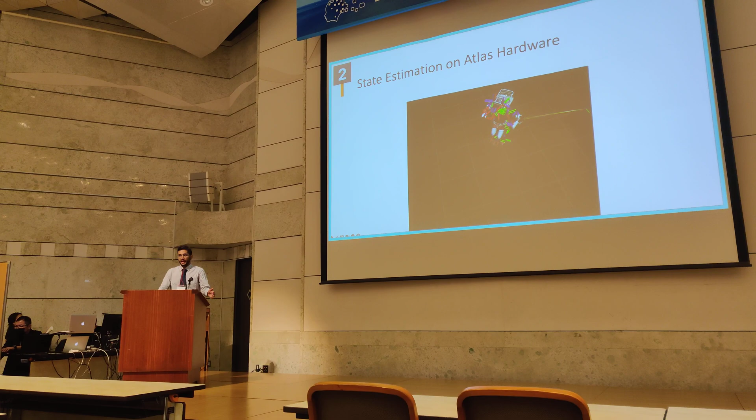Frameworks to perform proprioceptive state estimation on a legged robot. Here you can see an example of an Atlas robot with proprioceptive state estimation overlapped with the ground truth. You can see it's actually doing a pretty good job of the state estimation.

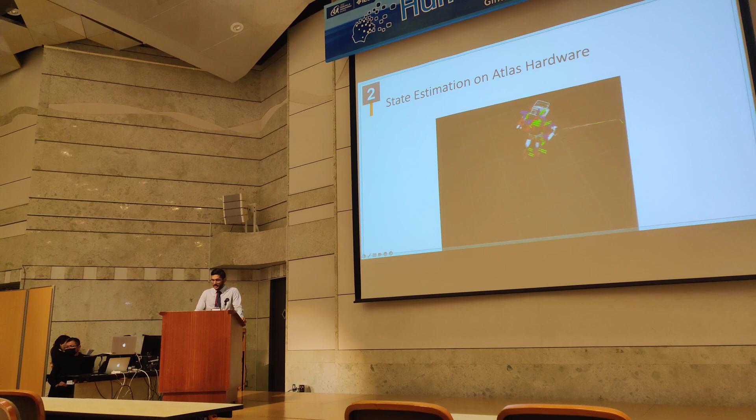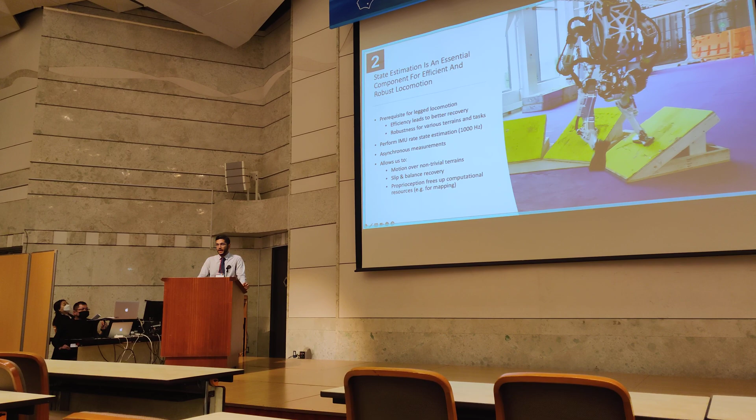State estimation is actually a very important problem because, as you've all seen, there's lots of cool work happening in locomotion. But in order to account for slip, various terrain mappings, and different unknown problems you might have with locomotion, having robust, accurate, and efficient state estimates is a very important prerequisite. The main reason we choose to do proprioceptive state estimation is because it also helps free up computational resources for other things such as planning or mapping. We saw this amazing talk right before about using an offline planner, and because the offline planner can now be online, you now have more compute.

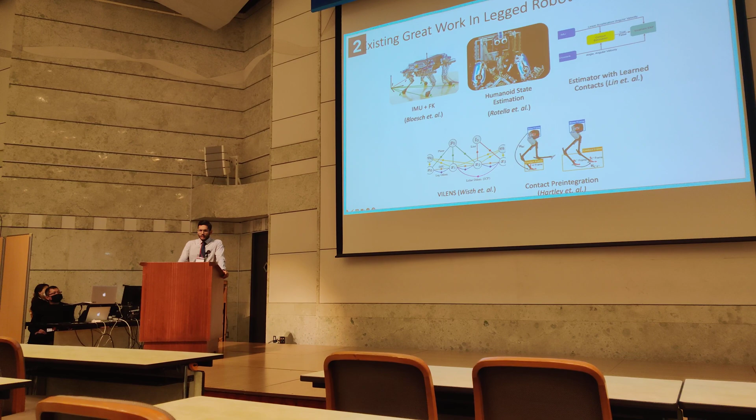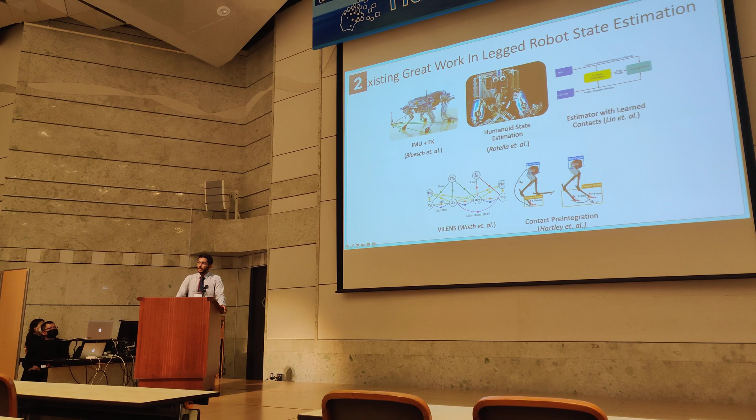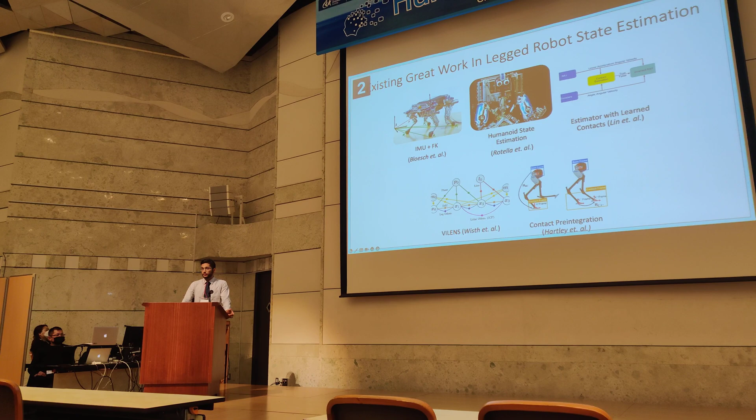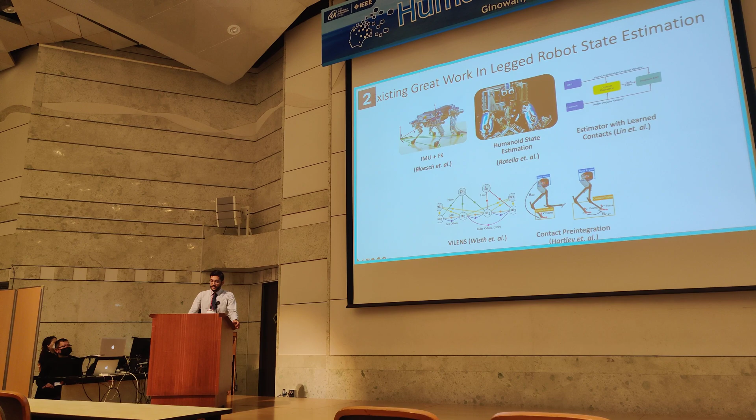There already exists a lot of great work in legged robot state estimation, and I want to position where our work stands with respect to this. The top row represents all filtering-based approaches, whereas the bottom row represents factor smoothing-based approaches. The original work that used proprioceptive state estimation was by Michael Bloesch in 2013, which used the IMU as well as kinematic legs. That was followed up by work by Nicholas Rotella, applied to a humanoid with a flat foot constraint, or point foot constraint. More recently, Tzu-Yuan Lin at the University of Michigan has done state estimation using learned contacts, via a neural network contact estimator.

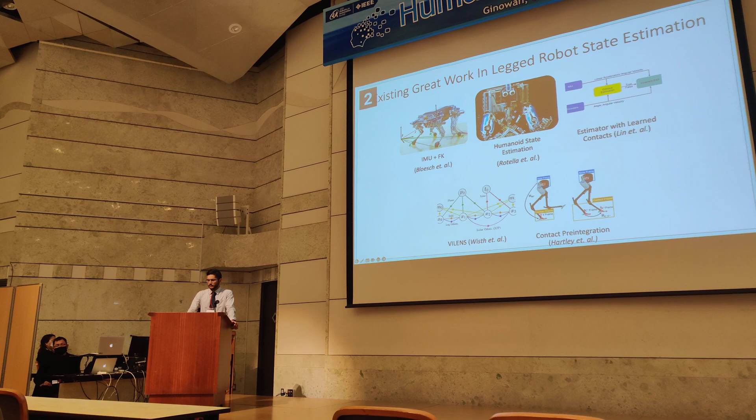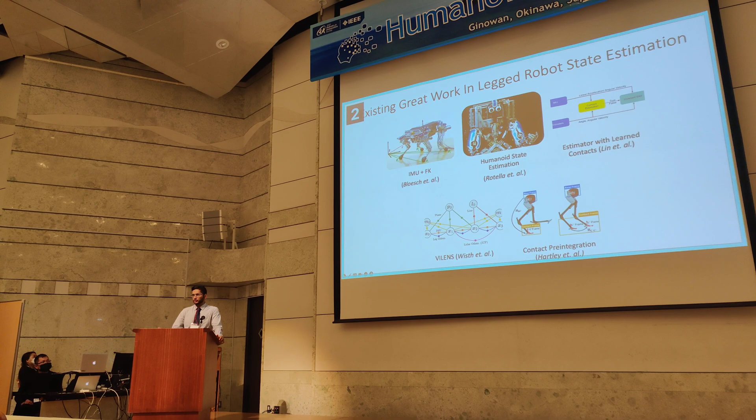On the bottom row, we have VILENS as well as contact preintegration. Both of these are actually hybrid approaches—they also use exteroceptive measurements. VILENS, the V and the L stand for visual and LiDAR. And contact preintegration also uses camera information to do state estimation. But the important insight we have from all this work is that all of these state estimators basically follow one particular factor graph formulation.

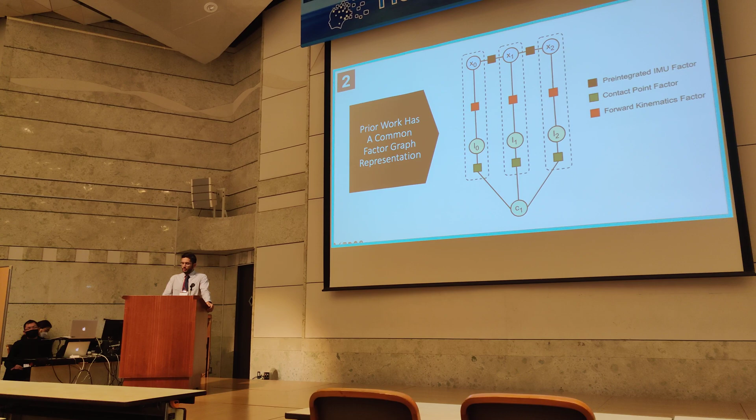All the x's represent the base states, and then you have the legs, with subscripts as the time indices. I'm using plate notation to represent multiple legs—not just two, but also four, six, eight, you name it. At each plate, the C1 represents the contact point, basically saying L0, L1, L2 are all connected to the same contact point—that's basically stance states. That insight is what we leverage in developing our proprioceptive state estimator, because now we can use the factor graph and its very useful properties in developing our framework.

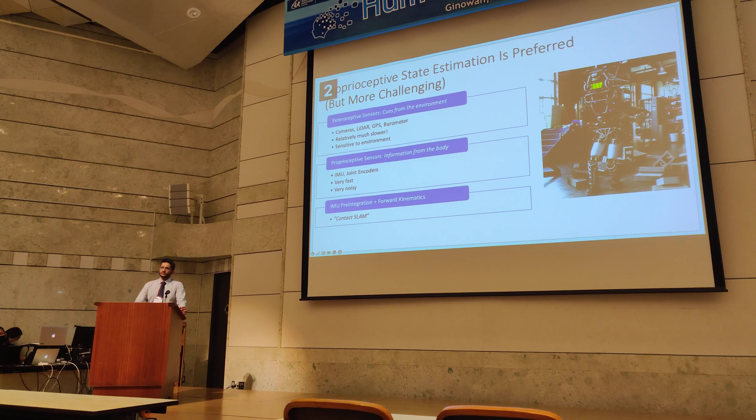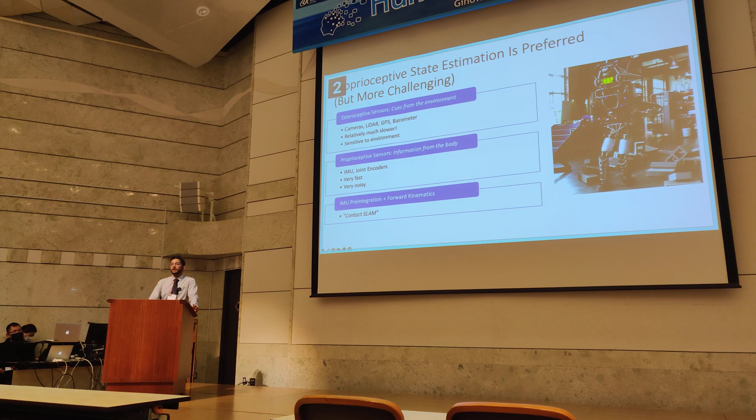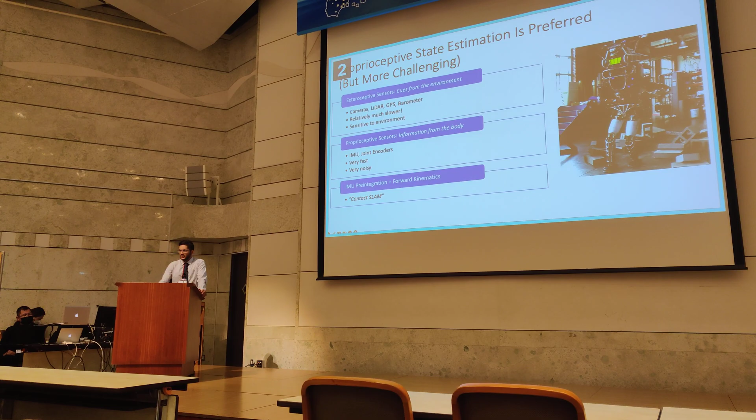Proprioceptive state estimation is preferred, but of course it is more challenging, because normally you get cues from the environment using camera, LiDAR, GPS, and a barometer. You get all this very useful information, but it's very slow and computationally expensive, especially cameras these days. And these sensors are sensitive to the environment—differences in lighting, differences in pressure, minor things. However, proprioceptive state estimation doesn't suffer from those problems.

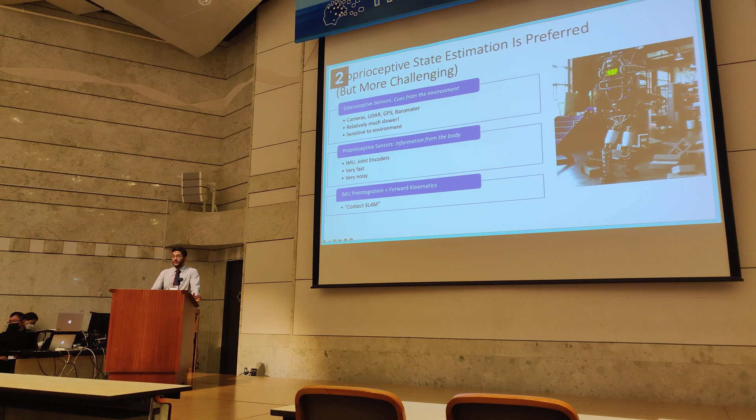Unfortunately, it is very noisy. IMUs, especially the ones on cheaper quadrupeds and cheaper humanoids, can be terribly noisy. They have very strong biases that need to be accounted for. But the good news is they're insanely fast—they can go up to 400 hertz, and the Atlas robot, for example, has an IMU that runs at 1,000 hertz. So if you get 1,000 hertz state estimation, that's pretty awesome.

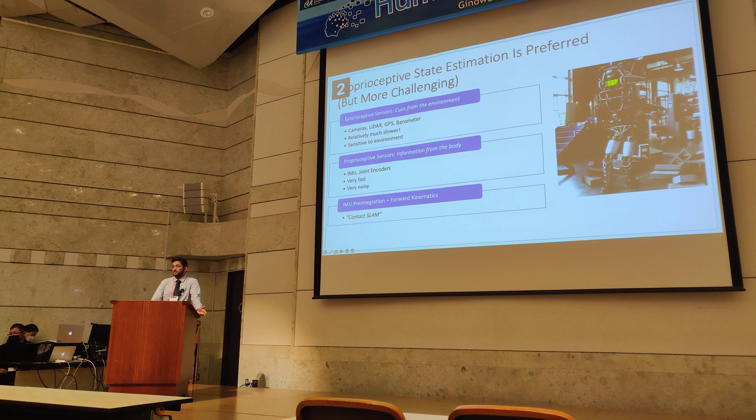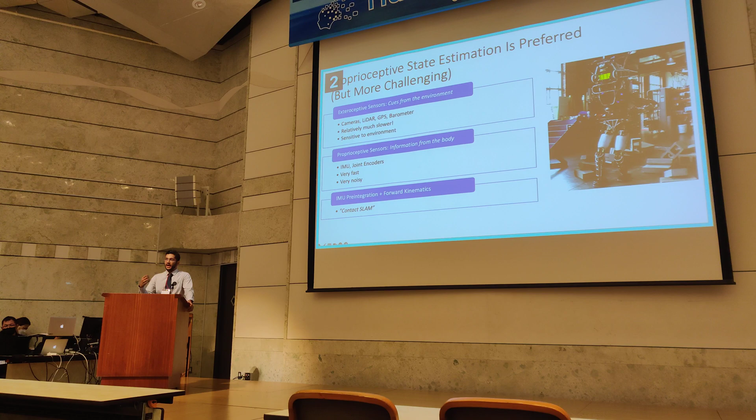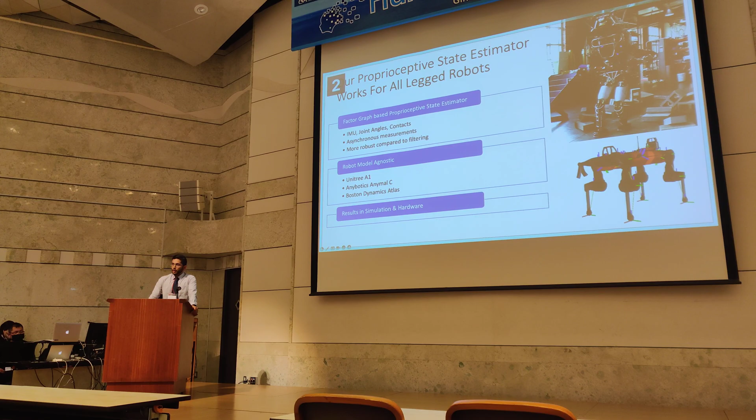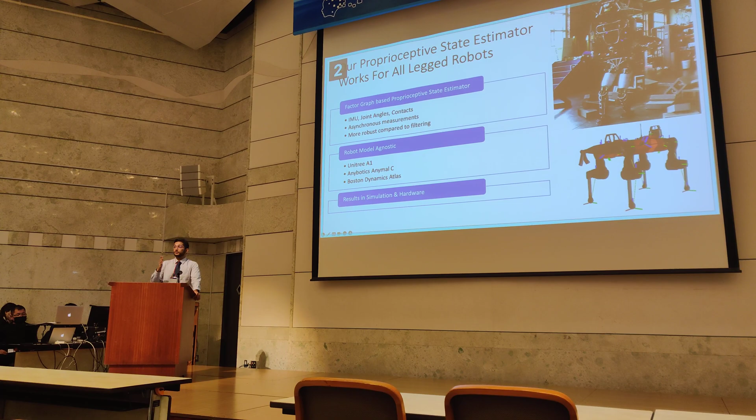So we want to take that approach and basically model this entire problem as a contact SLAM problem—your contacts are your landmarks, and your camera is the base of the robot. Basically, we're putting a blindfold on Atlas, as you can see. The cool thing about our framework is that it works on all legged robots. We only use the IMU measurements, the joint angles, and contact measurements. Our framework allows for asynchronous measurements, so all the measurements do not have to come at time-synchronized steps—they can come asynchronously, and we can still perform estimation accordingly.

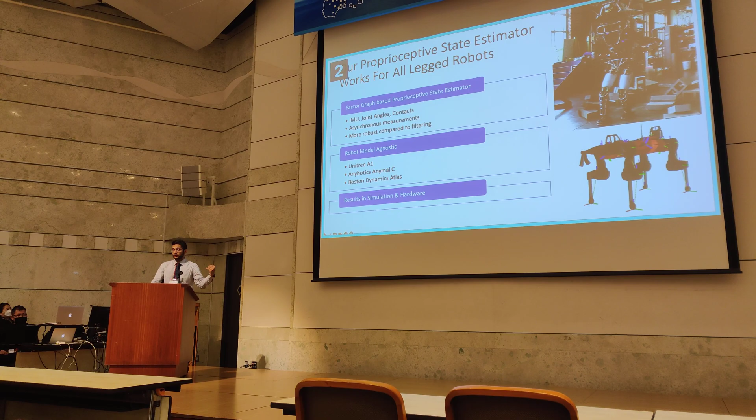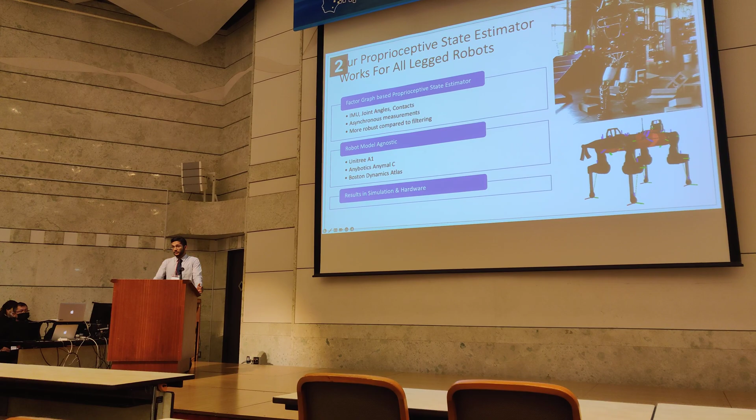It's much more robust compared to filtering because it uses the entire history of the trajectory rather than just the last step. As I mentioned, we are robot model agnostic, and I will show results on the Unitree A1, Anybotics Anymal C, and the Boston Dynamics Atlas. We show results both in simulation and on hardware. The key difference for our work is that we model each link in the kinematic chain—from the hip going down to the foot, with multiple links accordingly.

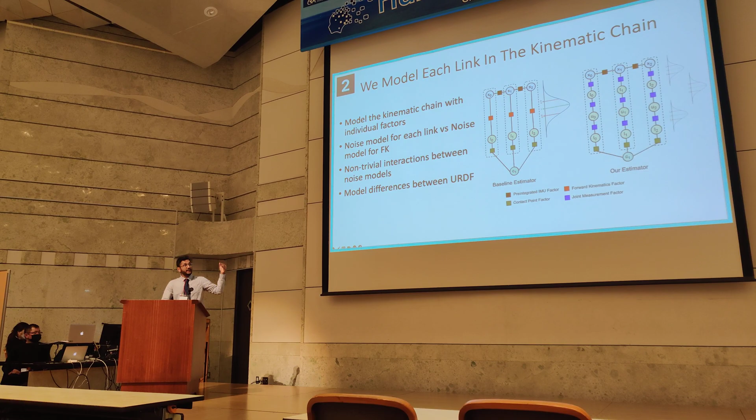So instead of having one forward kinematics constraint or one forward kinematics factor, we instead add this joint measurement factor for each particular joint. As you can see on the right-hand side, we have the upper leg link and the lower leg link, and each of them has a factor that constrains between the two individual links.

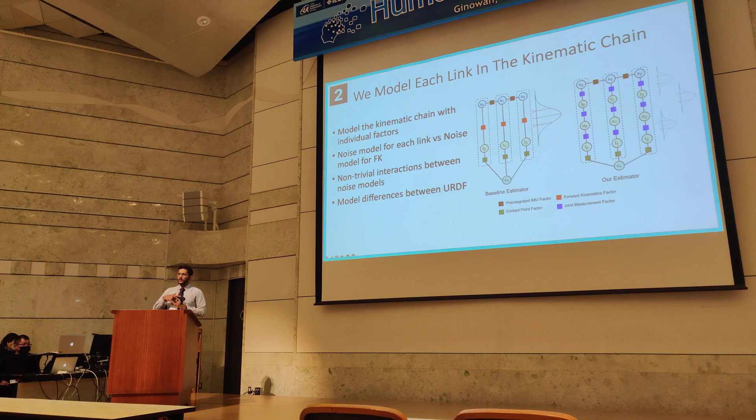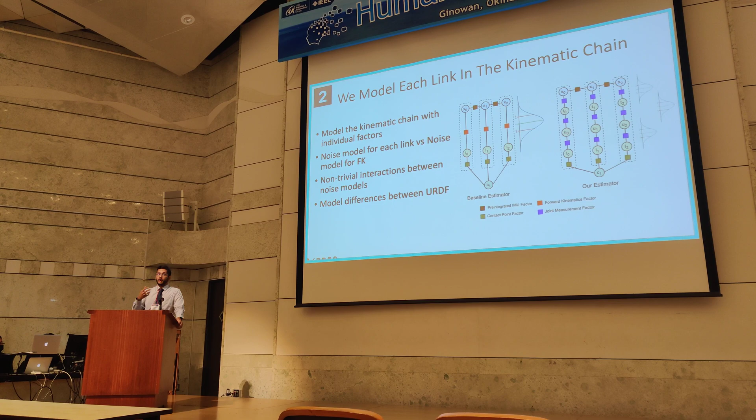The nice thing about this approach is that each noise model between the links allows for non-trivial interactions, and also can model deflections based on the URDF. For example, if the weight of the robot is very heavy and there are deflections based on the difference in the URDF from the manufacturer, our system can account for that deflection error.

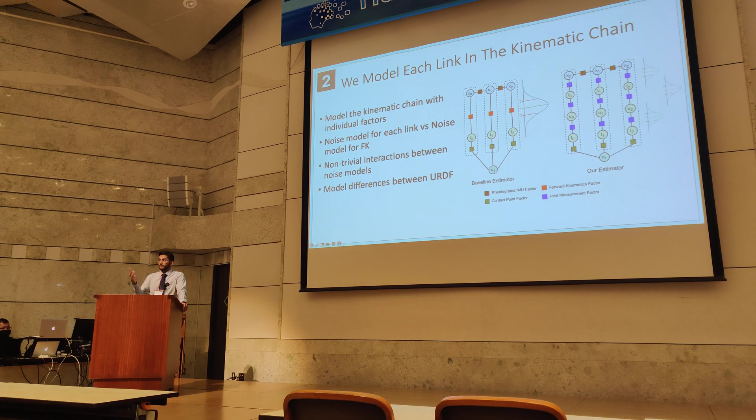And yeah, that's basically it. And to get this to work on different robots, all you have to do is give us a URDF and it just works. We construct a factor graph for you and we optimize.

Enough of the math, let's talk about some results.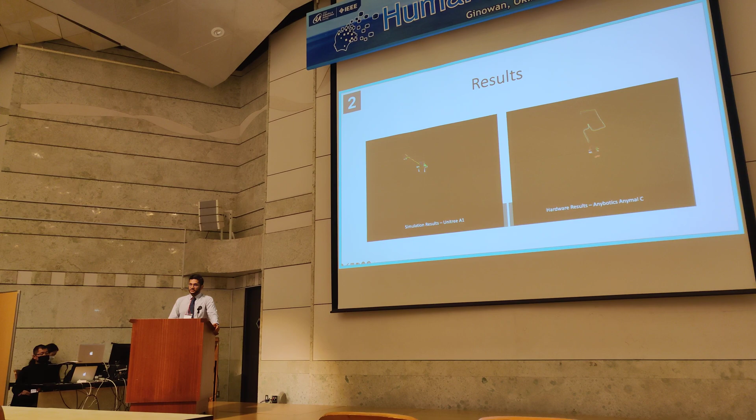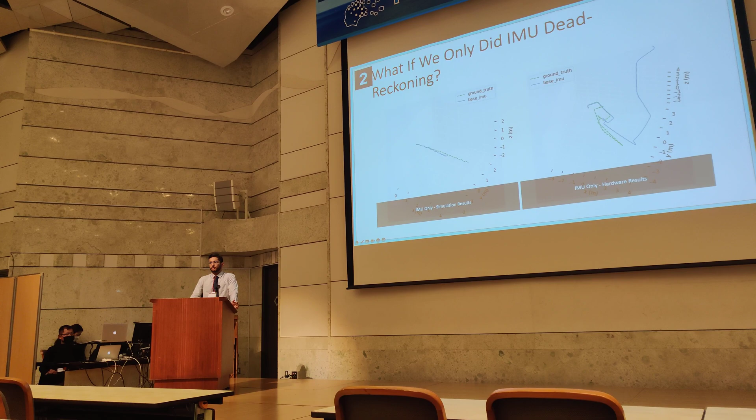Just to position ourselves, if you only use the IMU and didn't have anything else, just to give you an idea of how noisy IMUs can be, you can perform dead reckoning and try to get results. As you can see, the IMU decides to fly up on the Anymal robot, and it doesn't even reach the end in simulation, and that simulation was relatively noiseless.

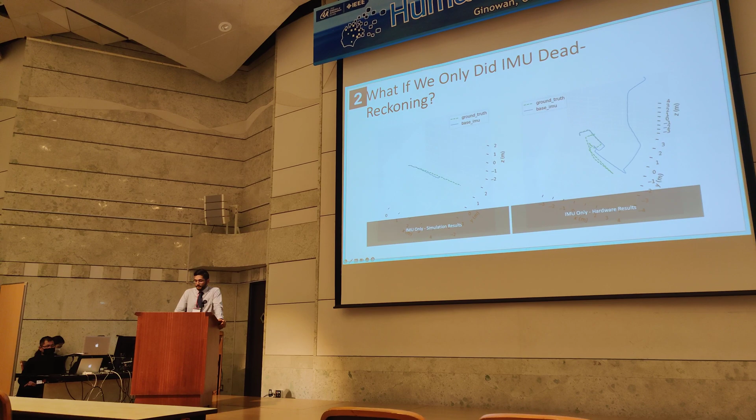So first, let me run through some results in simulation.

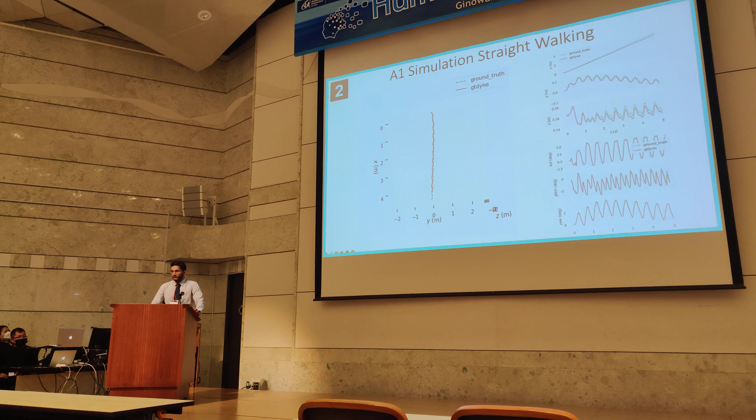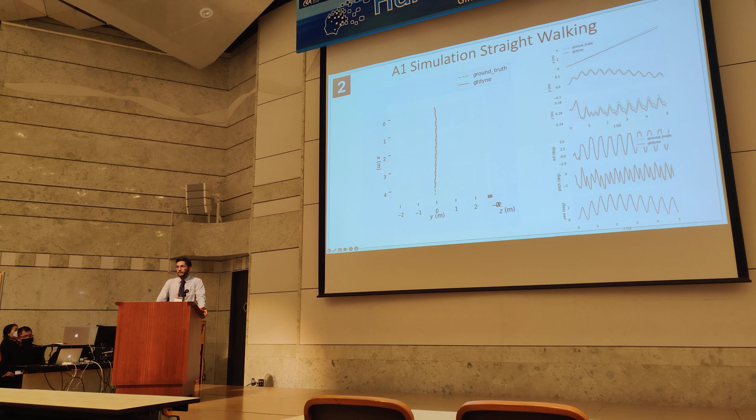It's very important to run in simulation because if it doesn't work in simulation, it's not going to work on hardware. So this is sort of like a litmus test - if it works well, then you can maybe deploy it on a robot and actually spend the hour, time and money potentially dealing with all the inconsistencies that come with working on hardware.

The cool thing is, our estimator just works on hardware. With minimal change - all you have to do is change some noise models, some parameter tuning, and just change the URDF. It's not a big difference, and as you can see, I'm showing results where we have three trajectories.

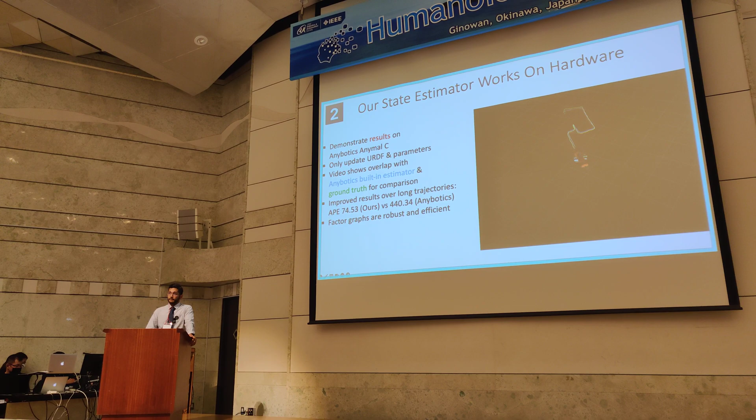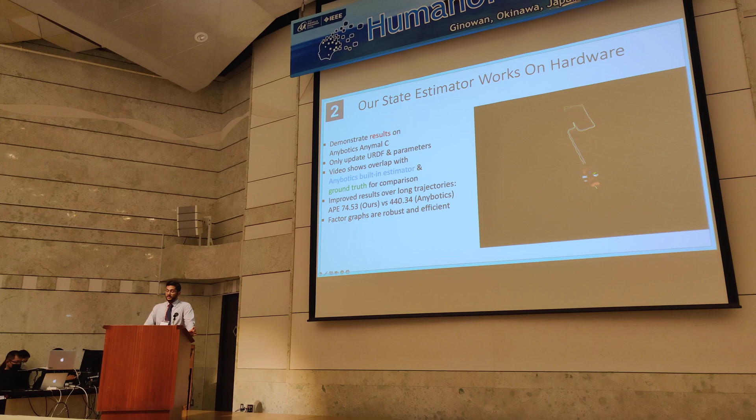The ground truth trajectory collected by a Vicon motion capture system, shown in green. Then we have the Anybotics built-in state estimator, rendered in blue, and then we have our state estimator rendered in red. As you can see, this is kind of like a Mario Kart ghost racer kind of deal going on.

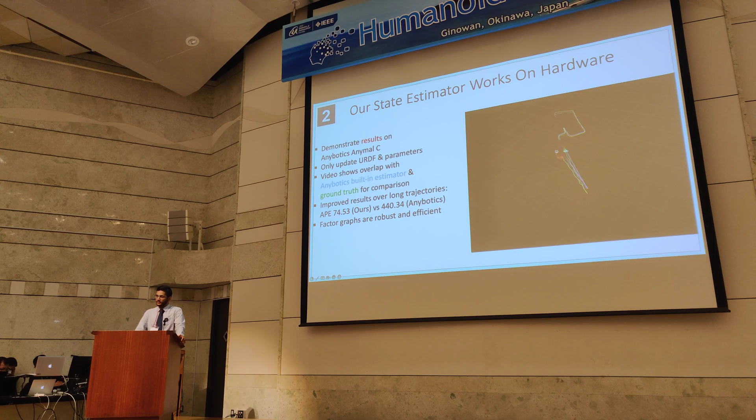As you can see, it's overlapping really well, it's running really well. And we definitely have much more improved results where the absolute position error, or the absolute pose error, APE, is 74.53 for our state estimator versus 440.34 for the Anybotics estimator.

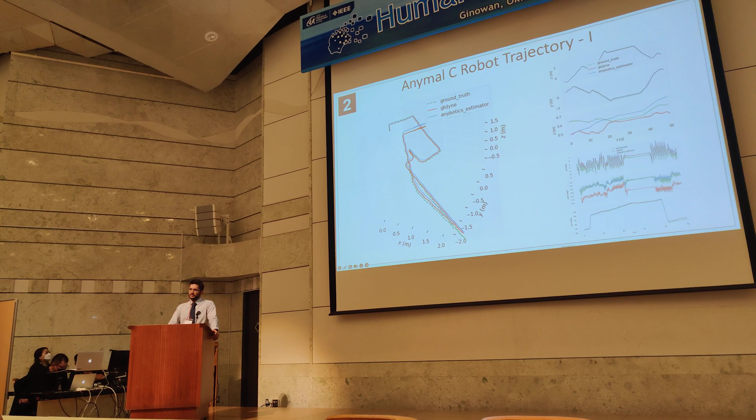And that's important because the Anybotics state estimator has been highly tuned by the amazing people at Anybotics. They've done a really good job with their state estimator, but what I'm trying to say is that there's still a lot more scope for improvement. And this is also sort of a testament that factor graphs are very robust and very efficient, and they can work really, really well.

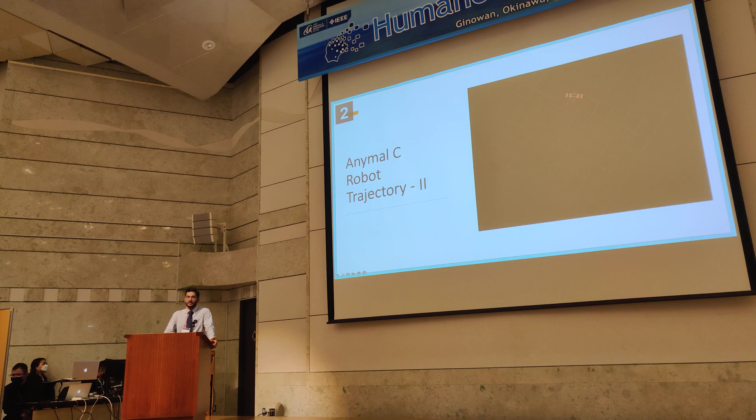So these are more diagrams showing results on pose and rotation, and this is one more trajectory that I want to show, slightly more complex, but I guess I'm going to skip this for lack of time.

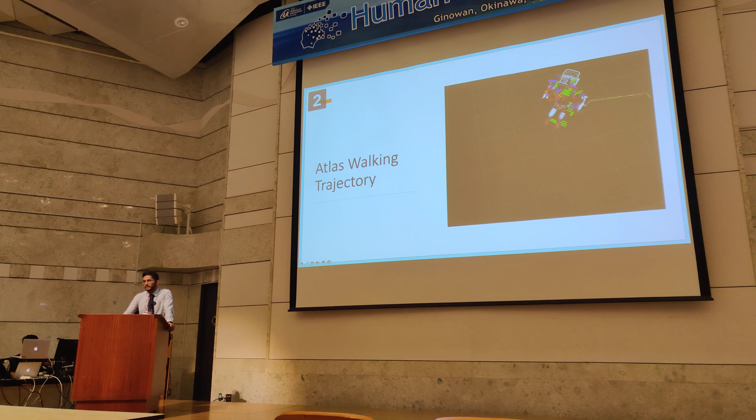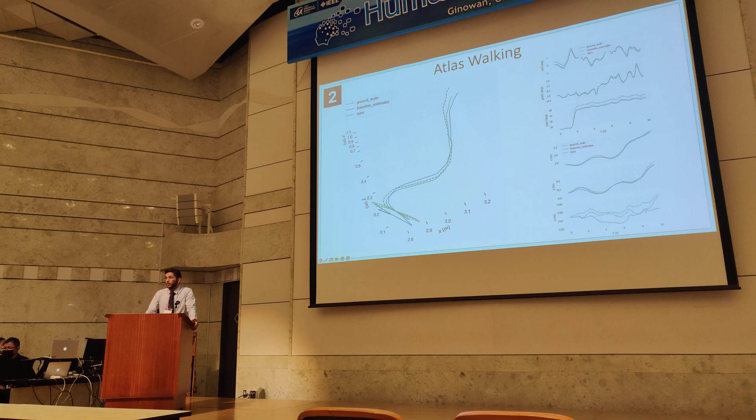Main thing I want to show is the Atlas walking trajectory. This works, again, really well. We've already seen this in the beginning, so it's just a rehash, but maybe we're more interested in these graphs. You can see on the right-hand side, we're definitely doing better than the baselines that we use - and these are all strong baselines based on estimators that actually deployed on the mini cheetah, for example.

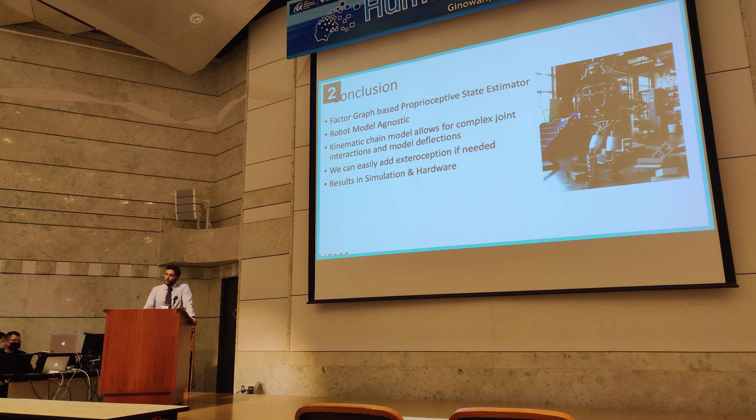So in conclusion, we propose a factor graph-based proprioceptive state estimator, which is robot model agnostic, and modeling the kinematic chain allows for complex joint interactions and model deflections. You can easily add exteroception via extra factors and extra unknown variables. We presented results in both simulation and hardware.